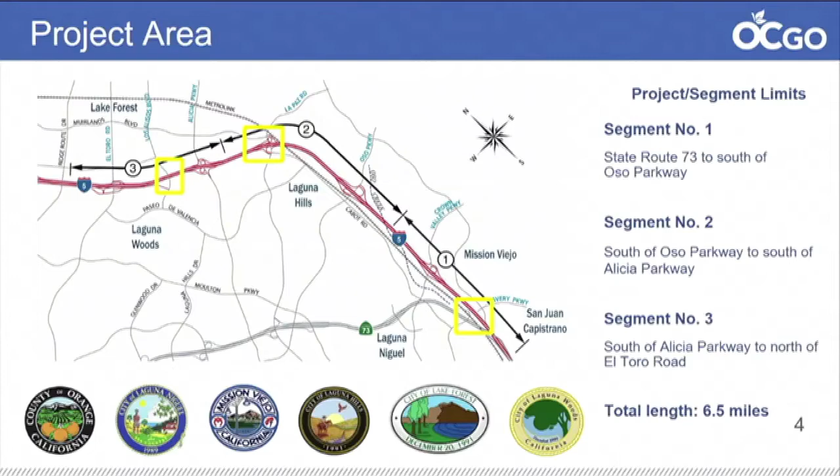Overall, the project improvements are to add one northbound and one southbound general purpose lane between Avery Parkway and Alicia Parkway. We'll also be extending the second high occupancy lane, the HOV lane, the carpool lane, between Alicia Parkway and El Toro Road. Today, in the southbound direction, those two carpool lanes converge into one, and we'll extend those two carpool lanes further south. We're also going to reconstruct some interchanges.

We'll be reconstructing and adding new auxiliary lanes, which are lanes where you get on at an on-ramp and it ends when you get off at the next ramp, helping us manage traffic within specific areas. We'll also be realigning, improving, and extending the length of the on and off ramps. Considering that speed limits have increased since the original freeway was built, we're extending and improving those ramps to give you time to get up to speed or slow down as you enter and exit the freeway.

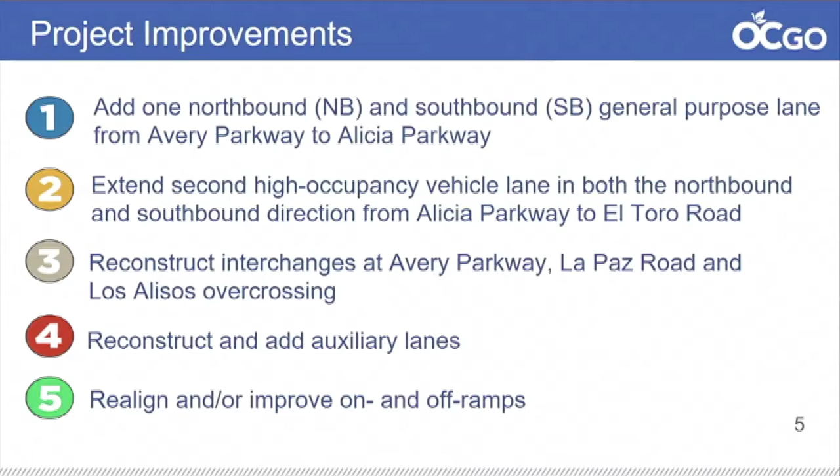One of the major components of the project is the Avery Parkway reconstruction, in segment 1. Today there are, for the most part, 4 general purpose lanes and 1 carpool lane throughout this corridor.

We will endeavor to keep all of those lanes on the freeway open during construction. But one of the things about Avery is that today there are 5 lanes on Avery Parkway, and when we're finished widening it, we will have 10 lanes. We'll also have new bike lanes as well as improved sidewalks for pedestrians and cyclists on Avery Parkway.

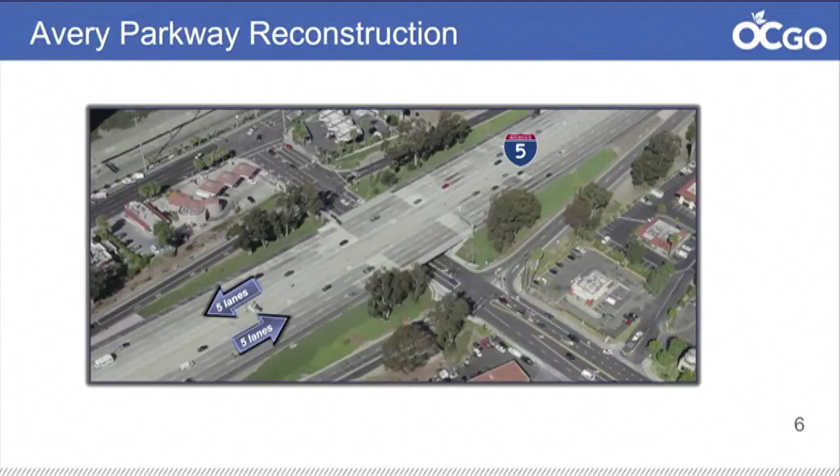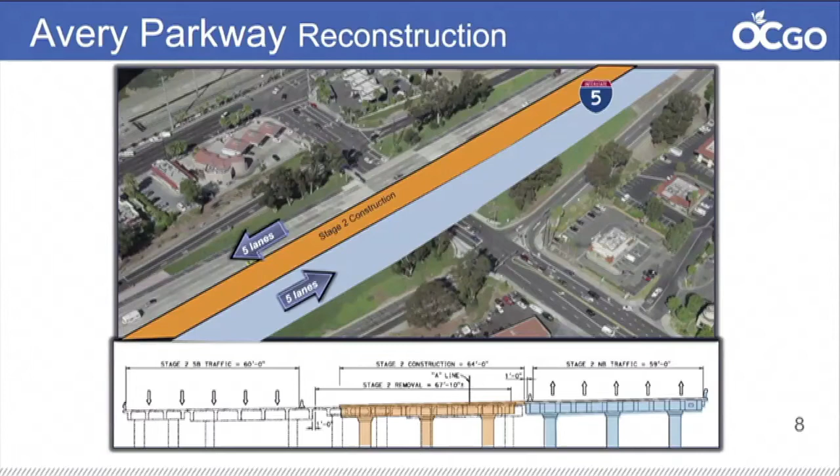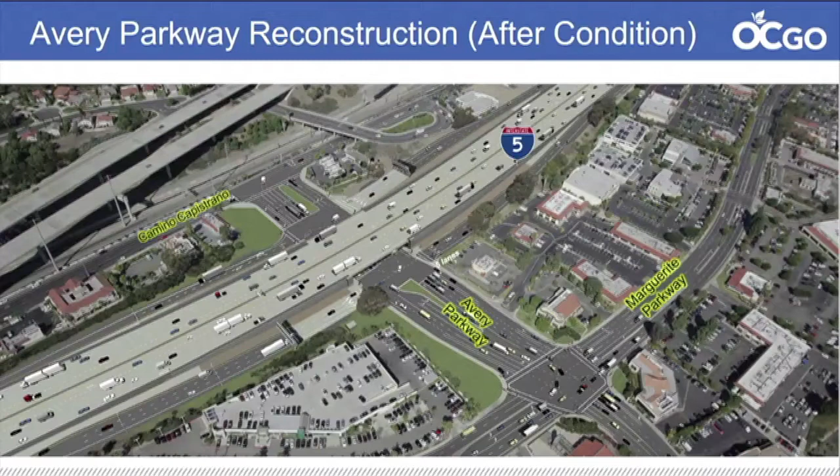This next slide gives a visual as to what Avery Parkway will look like after construction. It's got a nice architectural feature underneath Avery Parkway, and I'll get more into the aesthetics in a few moments, but this is essentially in keeping with the overall aesthetic of the project.

Similarly, along Crown Valley Parkway and Oso Parkway, which is next, we will be widening the freeway. Fortunately for those two overcrossings, we don't need to demolish them, so we'll realign the ramps as we widen the freeway. We will be placing K-rail throughout the project for the safety of pedestrians, motorists, and anybody else who uses the streets or the freeway.

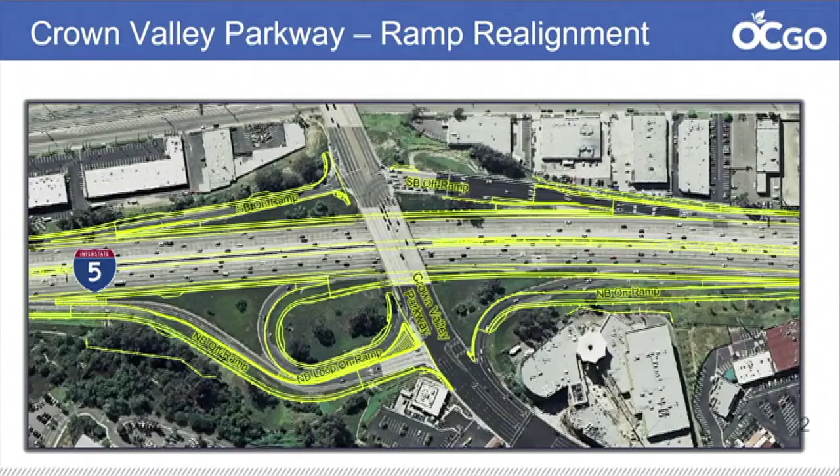So again, Oso Parkway, this isn't quite the same look, but it's essentially the same feel, that we will keep Oso Parkway open during construction. We don't need to demolish or reconstruct the Oso Parkway overcrossing.

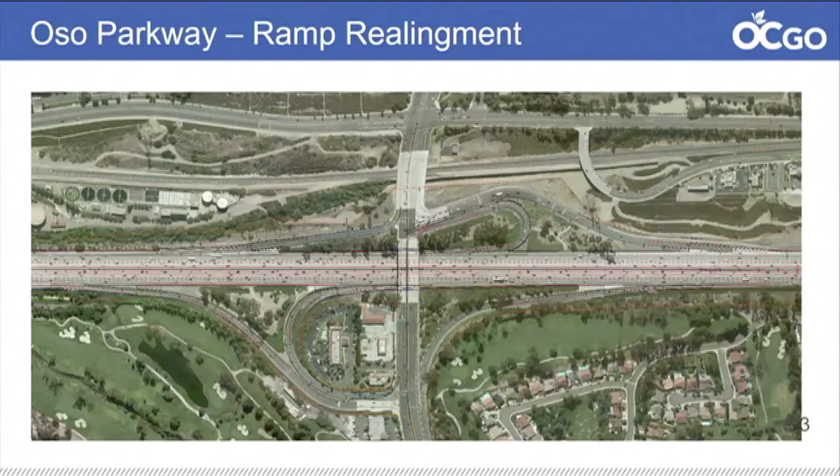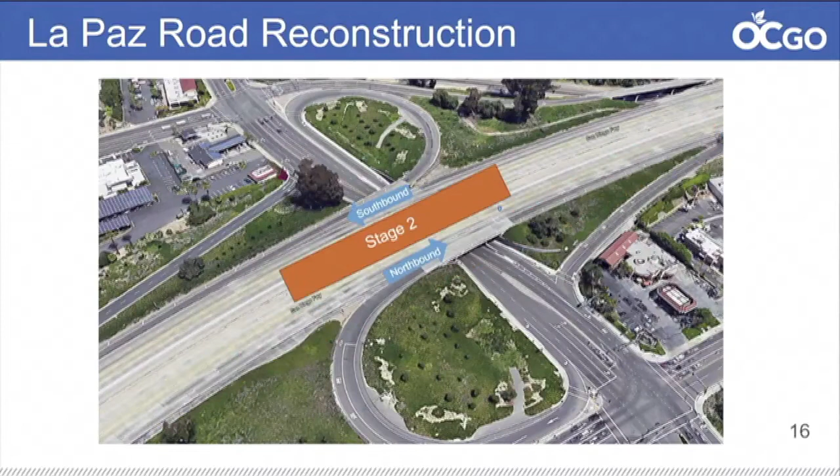The next large reconstruction is La Paz Road, and again this will be done in 3 stages, much like Avery Parkway. We will be keeping the freeway open during construction, as well as La Paz Road. I'll briefly run through the 3 stages without getting into too much detail. You can see stage 1, stage 2, and stage 3, and then when we're finished, we'll have La Paz Road with the same architectural features.

More to come later. We will have improved sidewalks, new bike lanes on both sides of La Paz Road. We'll have dual left turn lanes onto the northbound and southbound I-5 from La Paz as well, and a new standardized 15-foot clearance underneath the freeway on La Paz Road itself.

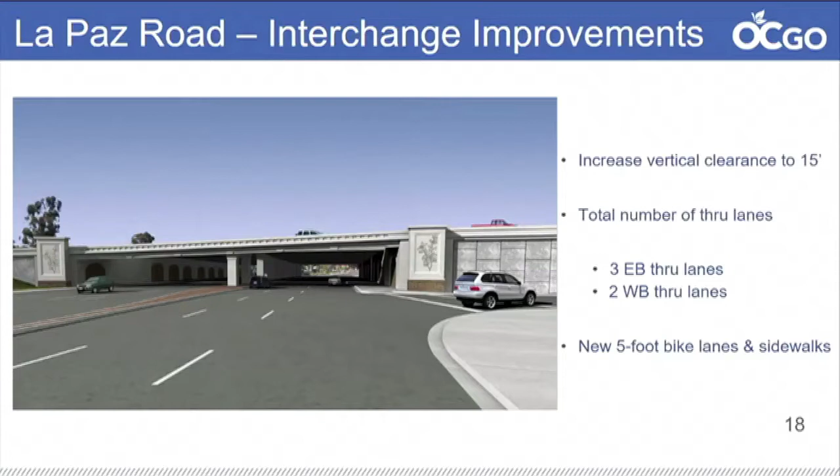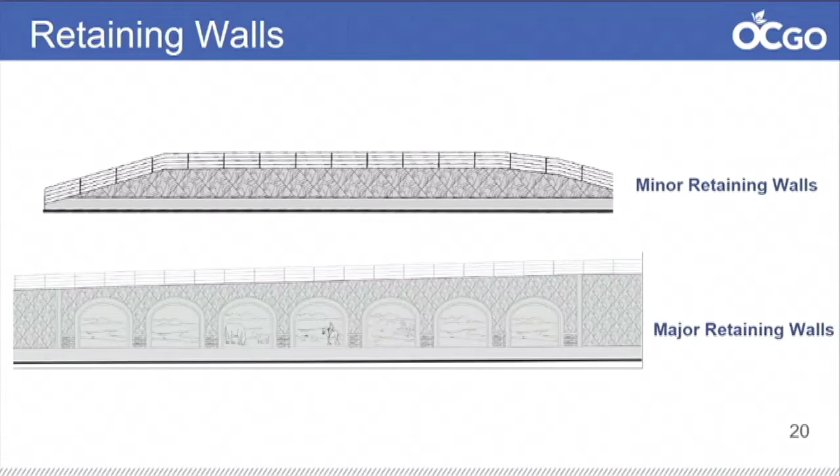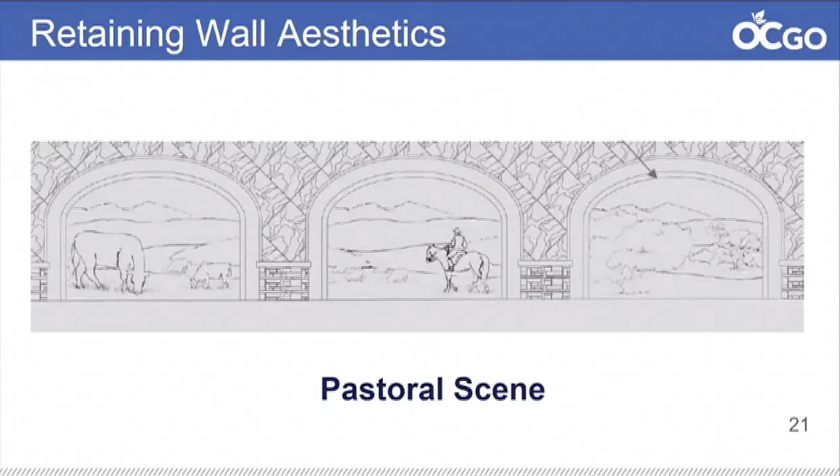We'll also have a number of retaining walls, with the same theme and aesthetic. We have many minor retaining walls and a number of major retaining walls. On the major retaining walls, we have this pastoral scene aesthetic, keeping with the area, the Saddleback Mountains, with a ranchero-style motif.

The location of those major retaining walls: under Avery Parkway underpass as shown earlier, also at Crown Valley at the on and off ramp in the northbound direction, at the La Paz Road underpass with the same motif, and on the northbound on-ramp at La Paz Road, where there's a large retaining wall just as you're getting on the freeway with the same aesthetics.

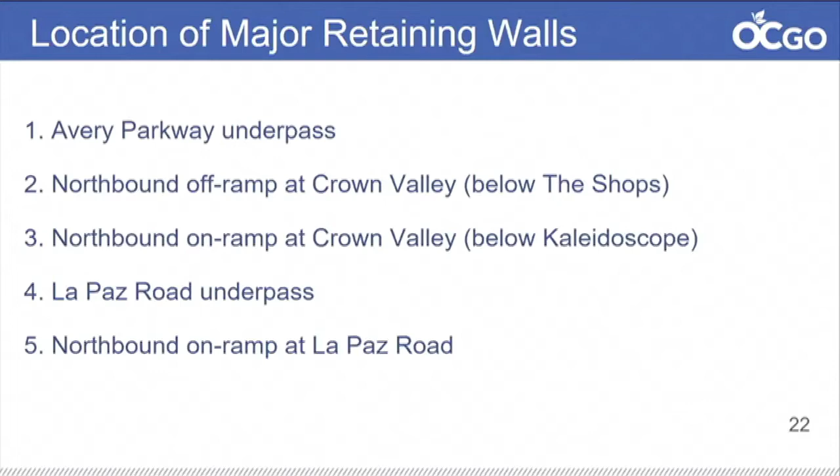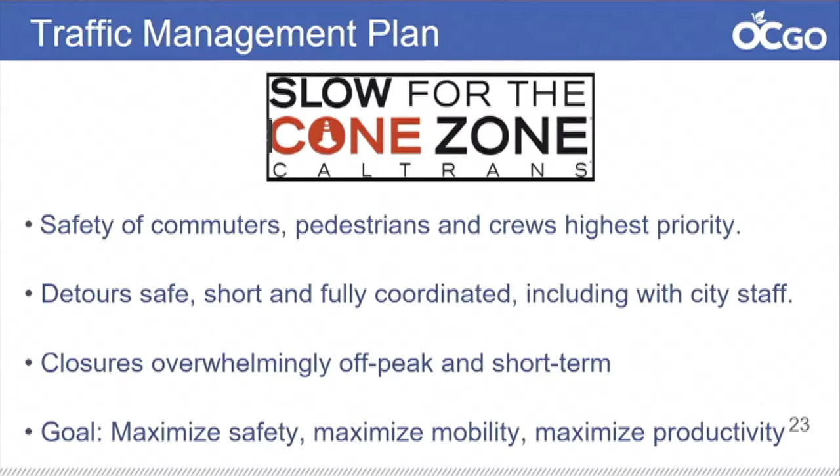We have an extensive traffic management plan, which we've worked with all of the cities along the corridors, as well as Caltrans, to ensure that traffic keeps moving during construction, and that potentially 3 separate contractors coordinate with each other so essential services can still get through the project all the way through construction.

The current activities: we're nearing final design. We've completed final design for segment 2, and we're approaching completion of final design for segment 1 and segment 3. The way this project is being delivered is segment 2, the middle segment, will be first. Segment 1, to the south, will be second, and segment 3 is to the north.

The thinking behind that is segment 2 is the biggest, segment 1 is medium-sized, and segment 3 is the smallest. The plan is to open all 3 segments at around the same time so we can have this new freeway open completely at once.

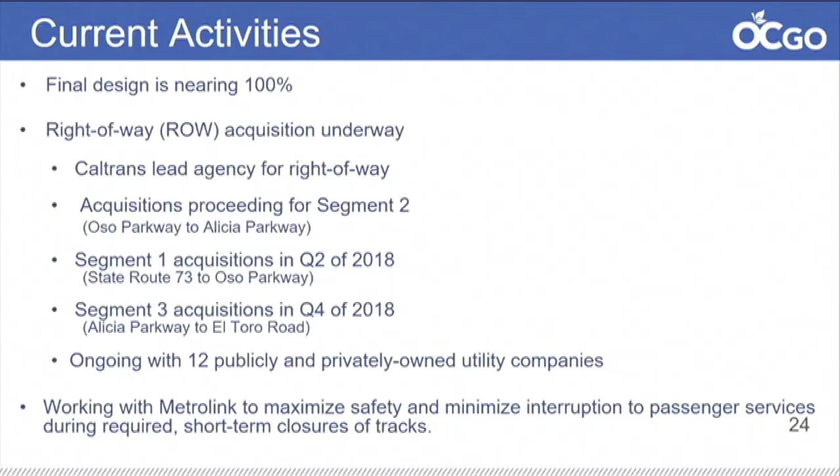We have an extensive public outreach and communications plan with this and all of our projects at OCTA, as we work with Caltrans and the cities. The cities have been attending all of our project development team meetings throughout the entire design phase. The plan is to make sure motorists, the community, residents, and businesses are fully aware of what is going to happen next.

We find that if people know what's going to happen, they can plan accordingly, and that's the most important thing—to get the word out via social media, mailers, more public meetings, any way we can, to fan out and reach everybody. We will also include the cities in regular public outreach meetings throughout the duration of construction.

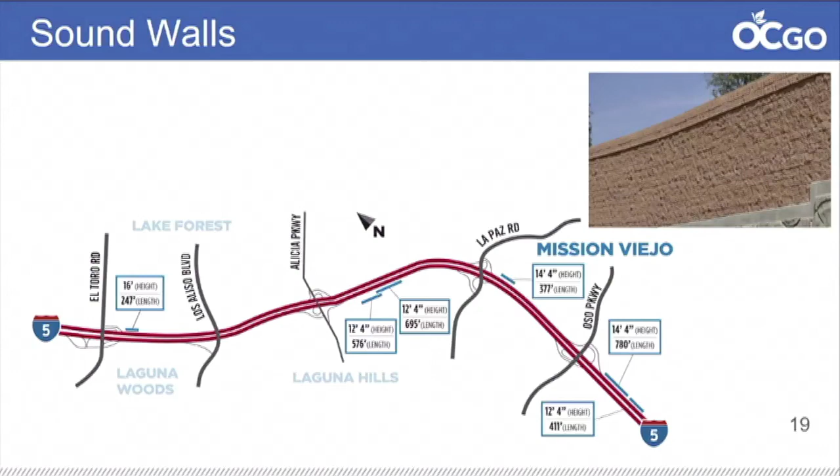As you get on Oso there heading north between Oso and the high school, you just look up there and you see just homes with wooden fences, and those residents have been complaining for a long time about the amount of noise. Right, those residences will not be receiving a sound wall as part of this project, again, because of the reasonableness and feasibleness criteria that we have to meet, which we didn't meet. There are a few locations in this project where we looked at that, we studied it, and unfortunately we're not able to provide sound walls to everybody throughout the corridor.

I know, well, they've got sound barriers up there. Anyway, go ahead. Okay, thank you. Thank you.

I've got a question for city manager and perhaps yourself, sir. Fixing the interchanges is terrific, and we appreciate all that. But if we have choke points before we get to those interchanges, it becomes a problem. We've had the La Paz Bridge widening on the agenda for quite some time. Is that going to be done in conjunction with this? What's the status of that?

It's still being reviewed by the Federal Highway Administration, and once we receive that approval, the plans and specs are done - it's just waiting for that final approval and the authorization to proceed. We're still hopeful that that'll be under construction by the end of this year.

Okay, because if we all come down to just the 2 lanes on the bridge, it causes more problems. Thank you very much for your presentation. Thank you, absolutely appreciate it.